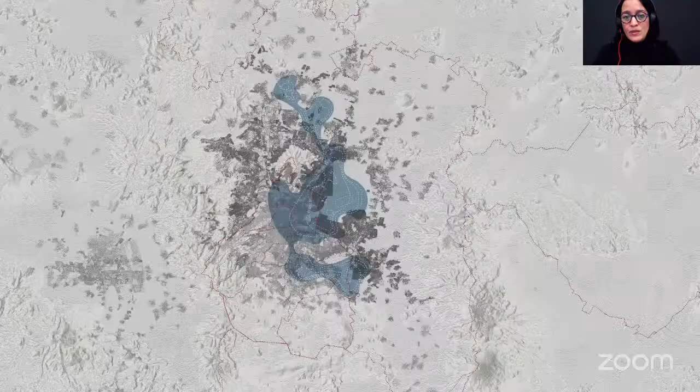These are the topics of some of the most known media about the water crisis in Mexico City. Mexico City is one of the most important cultural centers in the world, the most populous city in North America with 22 million people, of which 62% live in poverty.

Today, Mexico City faces one of the world's worst water crises. The two main sources of water supply are about to run out. If no action is taken, day zero may arrive.

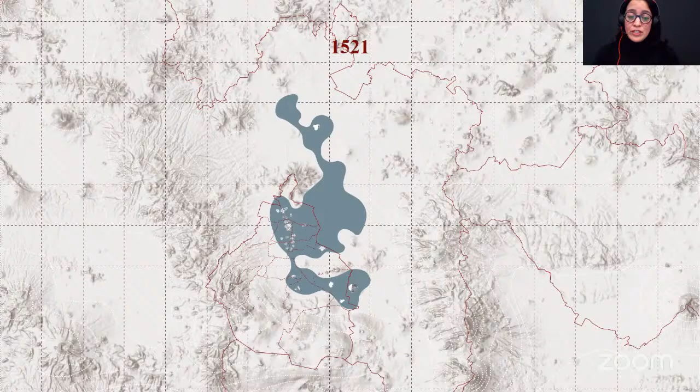What few people know is that 500 years ago, most of this territory was a lake. So how to erase a lake? In this year, the Spanish conquered Tenochtitlan, and from this moment, the drainage of the water begins.

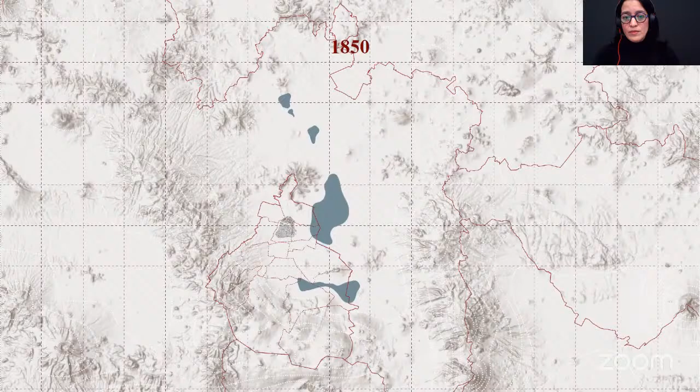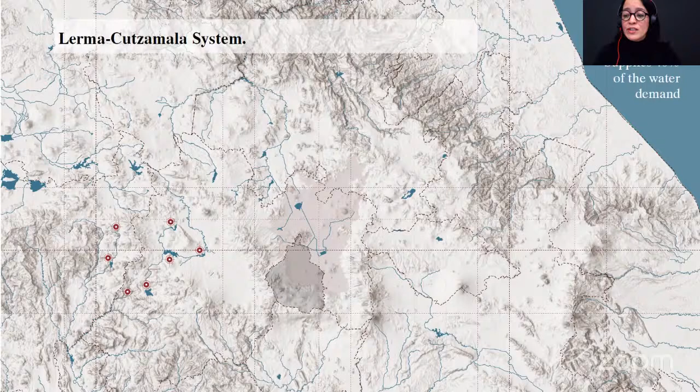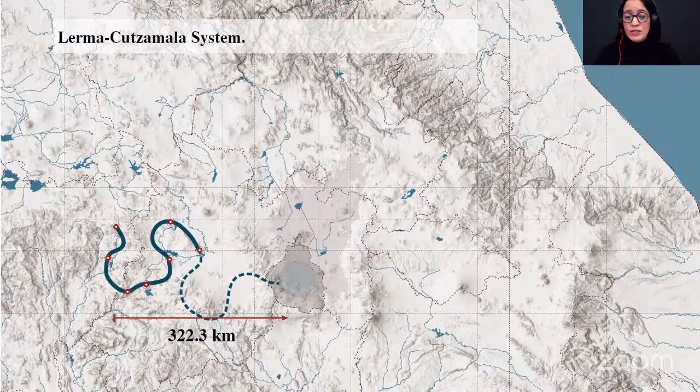So how to water a dry basin? How does it work today? First, Mexico City is located in an endorheic basin, defined as a region in which the river network is completely isolated from the world ocean. The water flowing in the rivers never reaches the sea. So the first water source is from outside the basin, called the Lerma-Cutzamala system, which supplies 40% of the water demand. The system consists of 7 dams outside the basin, where the water is pumped 322 kilometers. 40% of that water is lost due to leaking pipes. Today, these dams are only at 37% of their capacity.

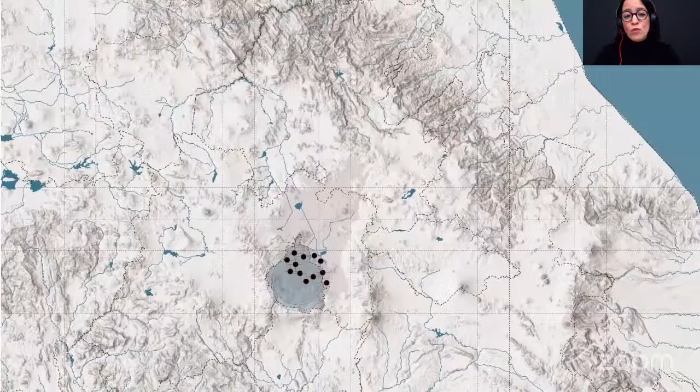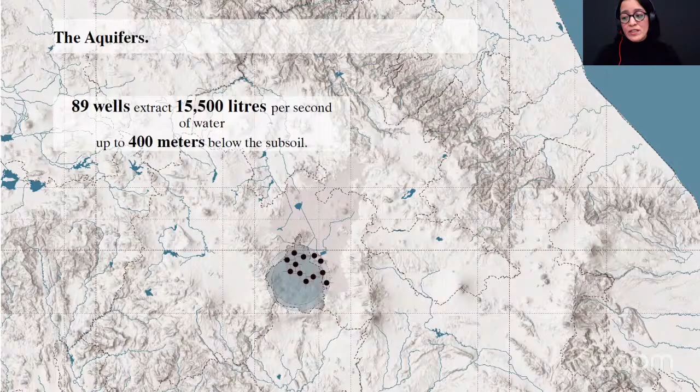The second water source is the aquifers, which supply 60% of our water demand. Located in the south, they occupy 17% of the surface of this endorheic basin. Today, these aquifers are overexploited by 215% without being recharged.

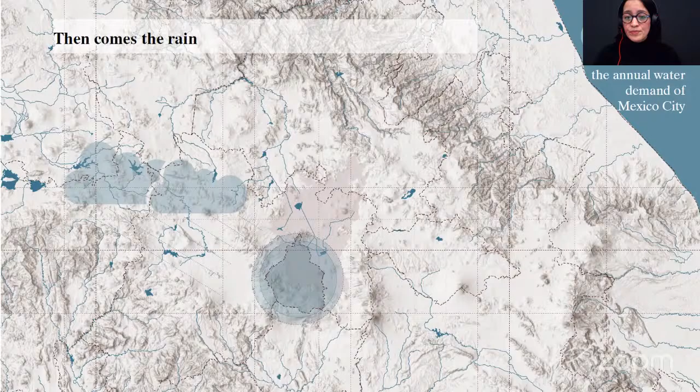And then comes the rain. It rains more than in London, and it rains 3 times our water demand in Mexico City. This is an image normal for us of a rainy day in summer in Mexico City, but if you live in another country, that's not normal. We are so fortunate — nature is giving us all the water.

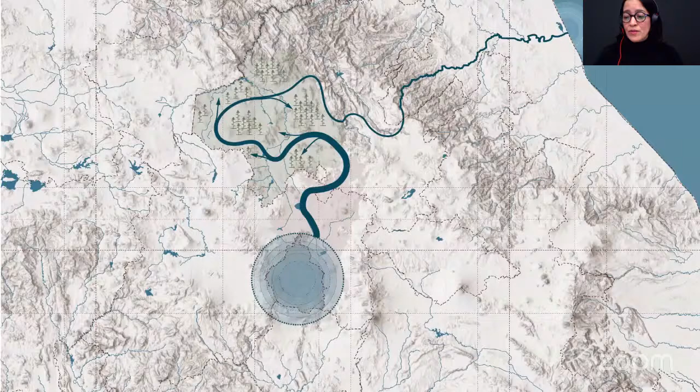But sadly, all this water is disposed, and after mixing with the raw sewage of the city, all the water goes outside the basin. When the water reaches the Mezquital Valley, part of the water is used for agriculture, and the rest goes to the Tula River, and in the end, it goes to the sea. That's how we get rid of all our water. Nothing stays inside the basin.

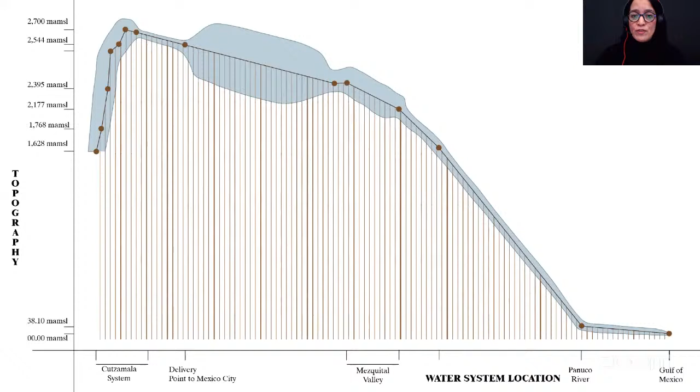This graphic shows the water journey in terms of amount and topography. We can look at the 7 dams at the beginning of this graphic, and the topography, how much energy we need to pump all this water to get it inside the basin. Then we lose 40% of it, and then we gain water again through rain and through the aquifers. Then we mix all this water and take it out.

And that's the problem. The aquifers are not being recharged. By removing all the water from the basin and having impervious pavement on the entire surface, they are being overexploited. All rainwater is contaminated with drainage, and the drainage system is at its total capacity and on the edge of collapsing. Water management in Mexico City, as you can see in this diagram graphic, is a linear and extractive system.

It should follow the natural cycle, the natural circle cycle. We should keep this water. We should reuse this water. So who has the power to make changes in the water management?

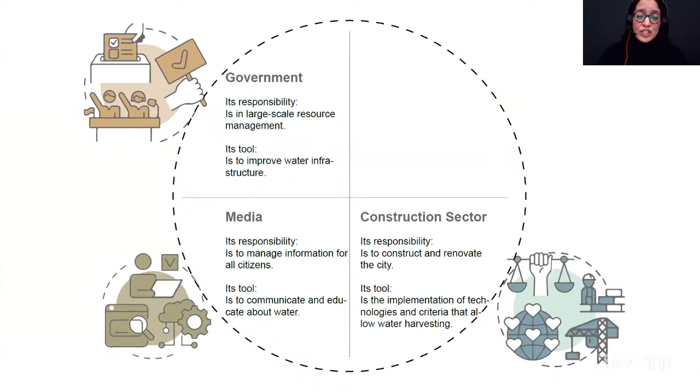First, the government. Its tool is to improve water infrastructure. Then the media as an educational tool to communicate about water. The construction sector with the implementation of technologies and criteria that allow water harvesting, and the citizens. It is a small scale, however, its impact is large scale.

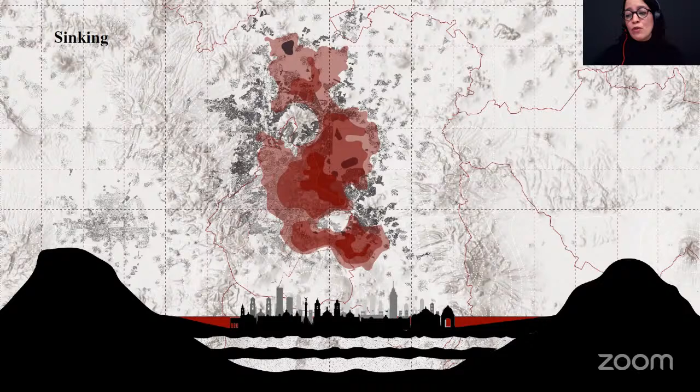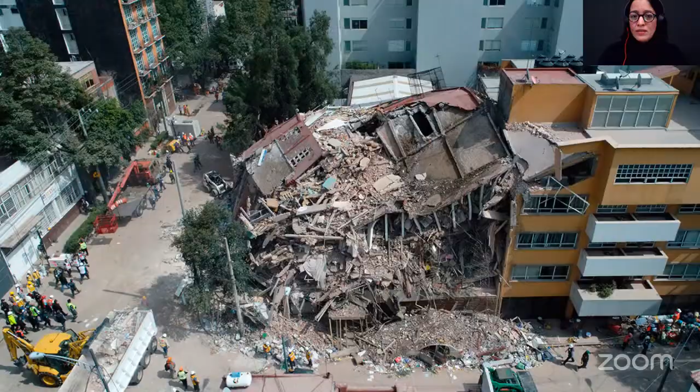But for us, our biggest fear is an earthquake, not a fire as here in Canada. There is an earthquake fear because we are living on mud. And not just that, because of the aquifers and all the extraction of them, there are new geological faults inside the city, which can generate earthquakes with an epicenter within the capital and worsen the earthquakes that come.

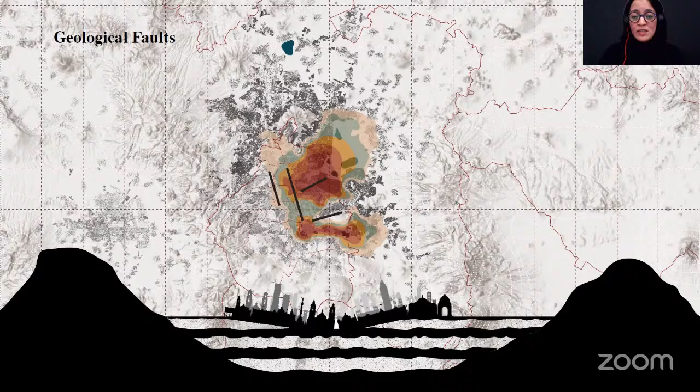And the worst, thirst. In a city where the percentage of population living in poverty is 62%, where 37% of households are victims of crime each year, is water going to be the new gold? Or are we going to care today?

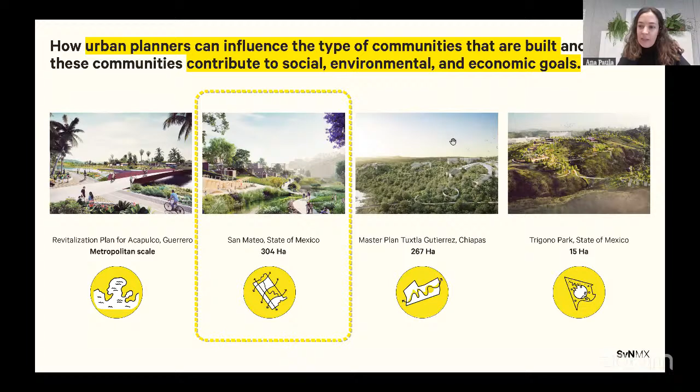So these are some of the projects that we've been working on in recent years. These have all been done with the private sector, and as we can see, there are large-scale portions of territory. So today I'm going to talk specifically about San Mateo in the state of Mexico, and the experience that we had with our client. The thing that we started to create here was four main strategies.

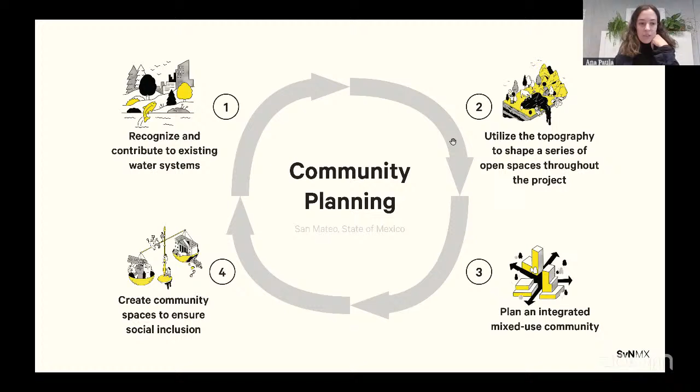So the first one was about recognizing and contributing to the existing water systems. As Ere was explaining before, we come from a history where the city used to sit on a lake, and today most of the water bodies have been gone. So what is the responsibility as us, as urban planners, to see how the city keeps growing?

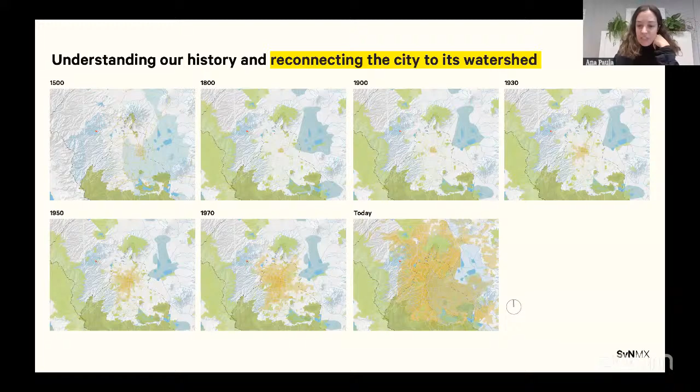So as you can see, this is what the ancient bed lake used to sit. This is the downtown area, and our site is located here in one of the ravines. These ravines located on the west side of the city are really important since they have their own ecological function. This area has been serving for infiltrating water into the aquifer, and it's really important for us to keep infiltrating this water since it avoids subsidence, and it's also 70% of the water that is consumed in the city.

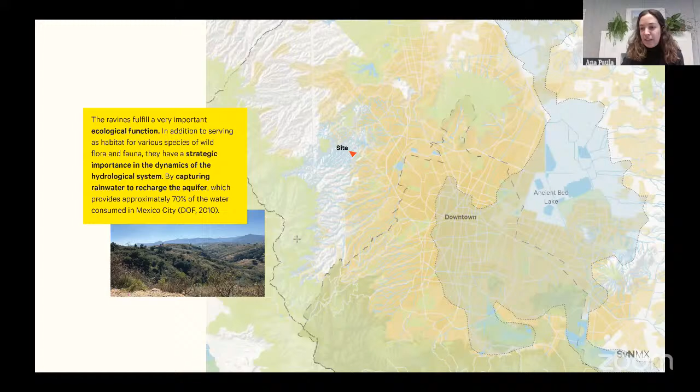So the first thing that we did for the project was analyzing the different landscapes of these ravines, and also recognizing the site's natural runoffs, understanding where the water is coming from, how it flows through these different ravines, and where it is going.

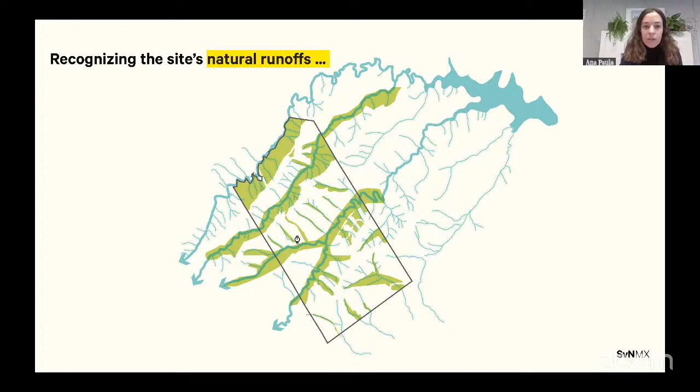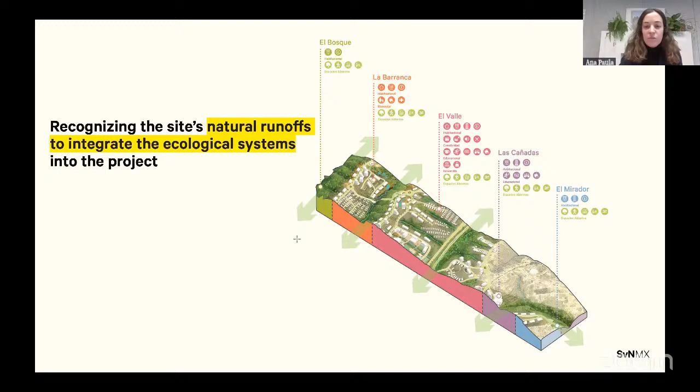So the challenge here was about how to merge the urban development with the ecological systems. For this, we applied different water strategies into the site, in which we decided how to add some floodable parks on the lower parts of the ravine to mitigate flooding. We also added the activities of reforestation along the runoffs.

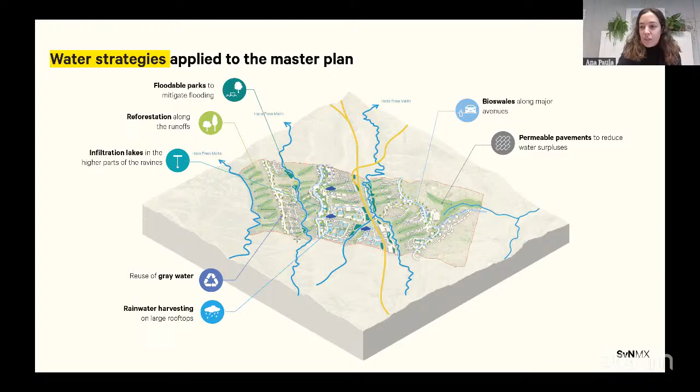Very important, having the infiltration lakes in the higher parts of the ravines as well as the bioswales, and also having rainwater harvesting on larger roofs. So these were some of the strategies that we started to apply to our project, intervening the different configurations of the master plan, on the roads, on the canals, on the roofs.

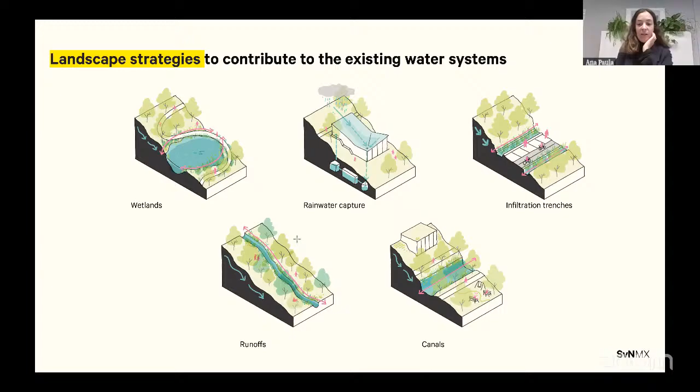The next one was utilizing the topography to shape a series of open spaces through the project. The first thing was analyzing how the ravines were configured. What we saw there was that we have these really big slopes, and there were some parts that were unbuilt areas and other ones that were built areas.

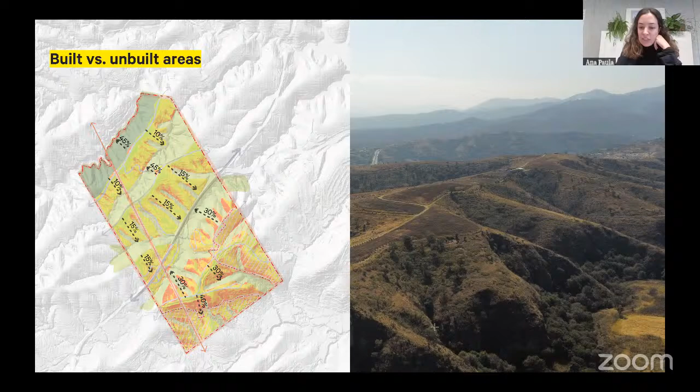We also realized that most of the vegetation was located on these unbuilt areas. So that helped us start working with the topography, creating vertical connections, outdoor stairs, having the topography allow us to have these green connections.

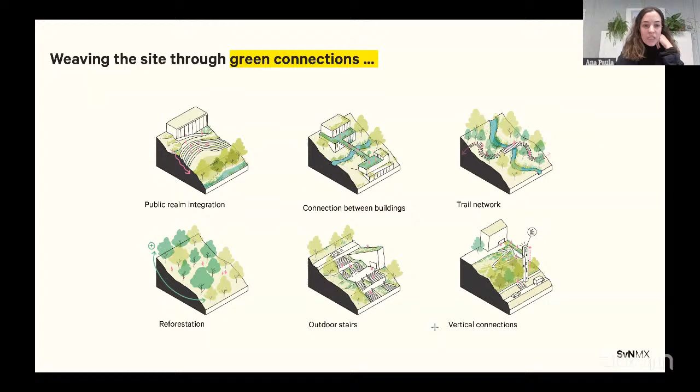And this was a great strategy because at the end, the ravines became the living green spaces. These would become the natural scenery for the development. These would be natural areas that would not need irrigation, systems that would live on their own.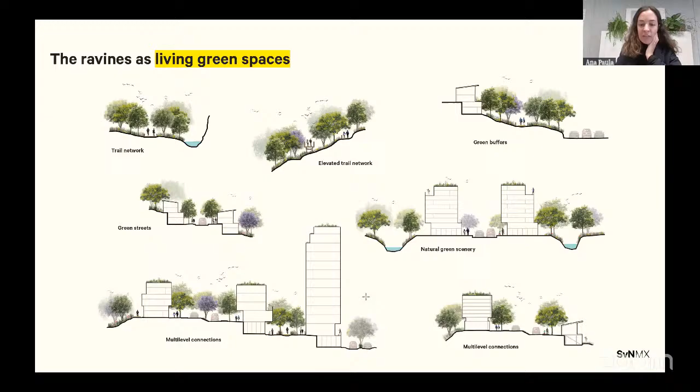And this is one of the renderings that you can see how the different buildings were set into the topography, how we had these floodable parks on the lower areas, and then activated through open space and public space.

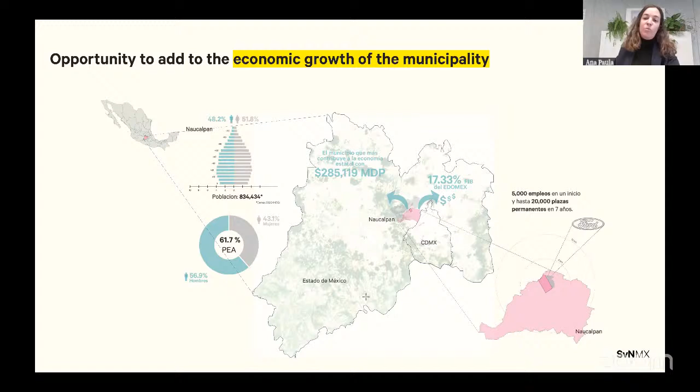Then our third strategy was how to plan an integrated mixed community. We know that this municipality has been having a lot of economic growth in recent years, and this is a lot inherited by the industrial sector located in the northern part of the city. We also have a lot of housing in the area, but we wanted to create a mixed-use community.

Here the client had different investors that were interested in the site. So one of the things that were part of the talk with our clients since the beginning was how to create a mix of hubs that could integrate in the same place. This is something very innovative for the area, since most new areas of the city become only housing areas, and people keep coming for work to the center of the city. So this was kind of an idea of trying to have a polycentric city, creating areas where people can live, work, and socialize.

So on one side, the client had a university that was interested in the site. They also had a film studio that wanted to invest in the area. They also knew about this new opportunity of creating a program of senior living, so that was like the health and wellness piece. And then we could also have innovation and technology adjacent to the industrial sector located on the site. So this became a really interesting exercise on how to create these possible program scenarios, and how the different uses would integrate and work together on the site.

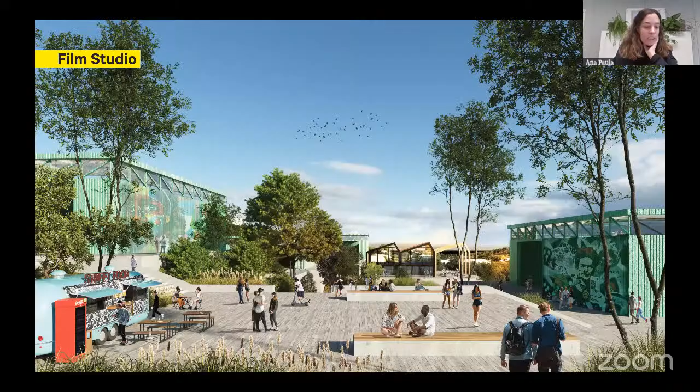As part of the last strategy, we looked at how to create community spaces to ensure social inclusion. We thought that was a really important topic since there's a big effort in tackling inequality here in the city, as Ere was mentioning as well. So what we did is propose 3 different community hubs along the project: one was the urban park at the north, the university hub at the center, and a community center on the south of the project.

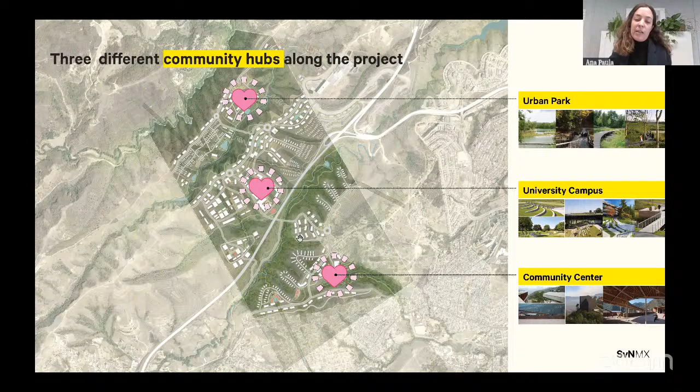I think this one was the most interesting, since we had some informal settlements next to our site. Talking with the client, we thought about having different programs in which we would give some social infrastructure to all these urban dwellers. So what we did is create a community center, a community library, and a park, so that way we could connect and give some services and social infrastructure to the rest of the city.

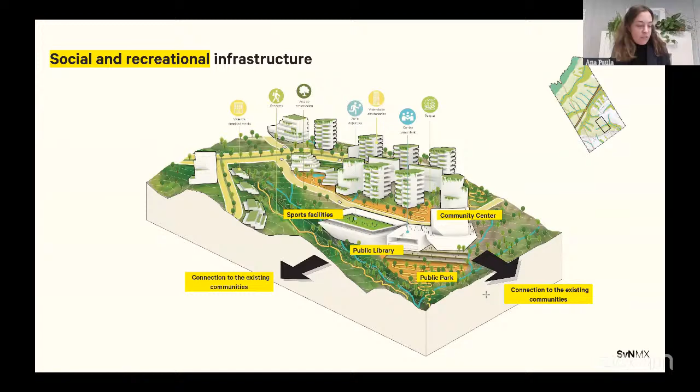And this would be all. I think it was a really interesting project that we did. This was a really concept design, but it was a nice exercise to work along with the private sector and see other ways to plan the city, because at the end we might think these are only enclosed developments, but at the end we're also creating the city. So I think it was a really successful exercise. Thank you, everyone, and I'll pass it to Monica now.

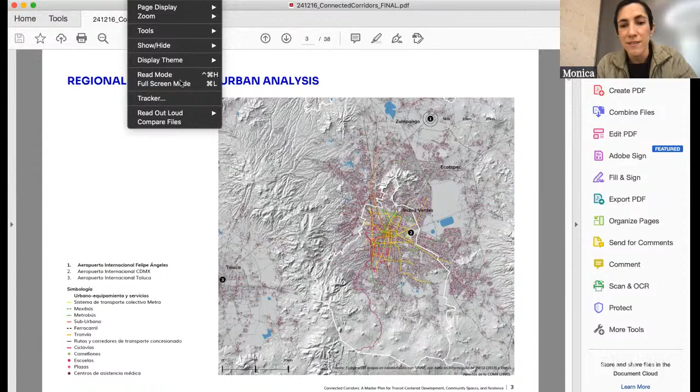Monica, we're not seeing your presentation. No, no, pero... there it is, no, pero. We're now at page 3. We can see page 3. Should I present it differently? Yeah, you can. Can you see it now? We can see your screen, the slide is number 3. Okay, is that okay?

Yes, sure it's okay. Yeah, okay, we did.

It was a challenge because we work with the public sector, actually the military. So we did a very deep analysis so we could fundament our theories and what we were going to prove.

So this is a regional analysis about the urban area, and how the city and the public transport in the city has expanded. All the water systems in Mexico and the environmental analysis.

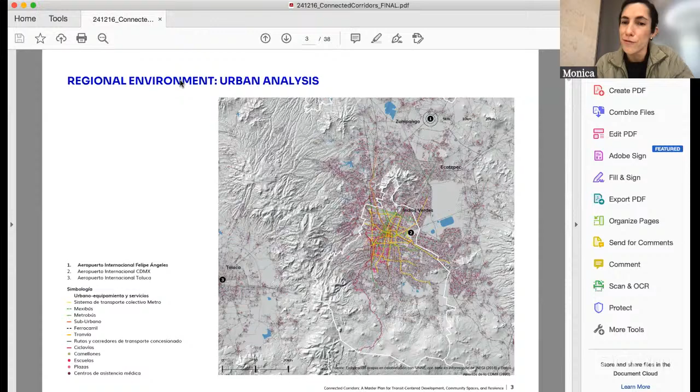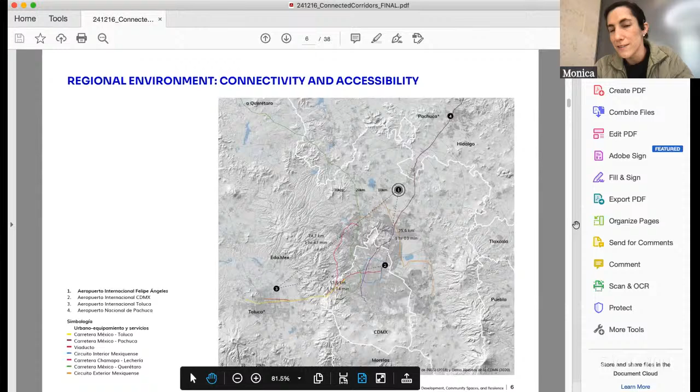I'm going to go through this very fast. This is really interesting, we're just seeing page 3 still. So I'm going to do it here. Yeah, better, there we can see it. I don't like it, but it doesn't matter.

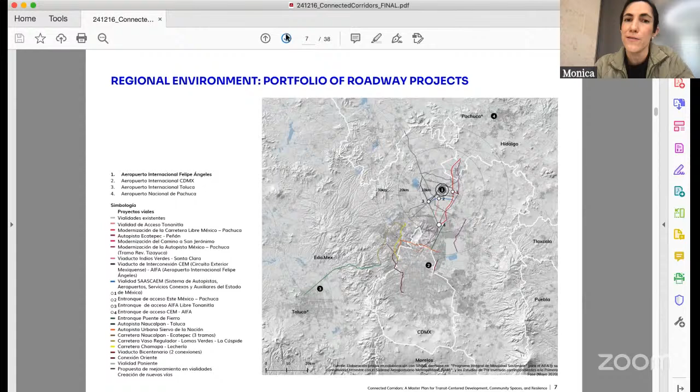So this is a map showing all the future projects that the military, the public sector, and the private sector were going to implement in the following years.

And this is the site. So you can see it's a very small site right next to the highway, where we analyzed the flood risk and the mobility system that we're going to go through.

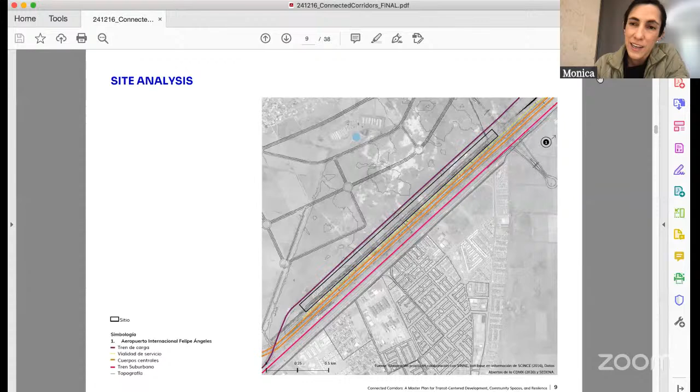Actually it was the suburban train, the industrial train, a mobility tram that was going to be located right here, and the airport that was going to be located in the north. It's actually already built.

So our opportunities were to implement strategies that actually detonate the economic activity of the area, because it's surrounded by very low income housing.

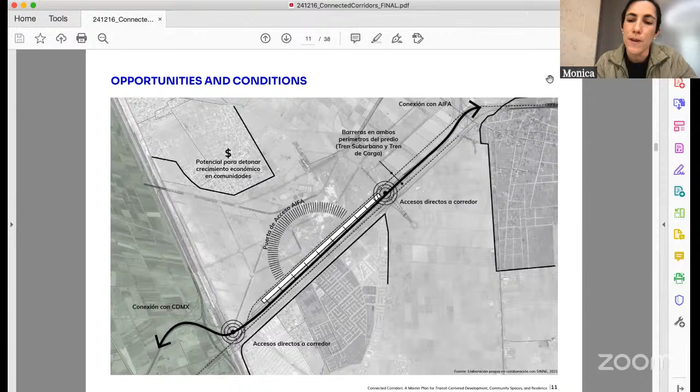But also give a space within the huge mega scale site, give a human scale so the adjacent communities could have community and public spaces. So although the project is small, it is significant for its comprehensive approach, combining hydrological, social, economic, and transportation-oriented development solutions.

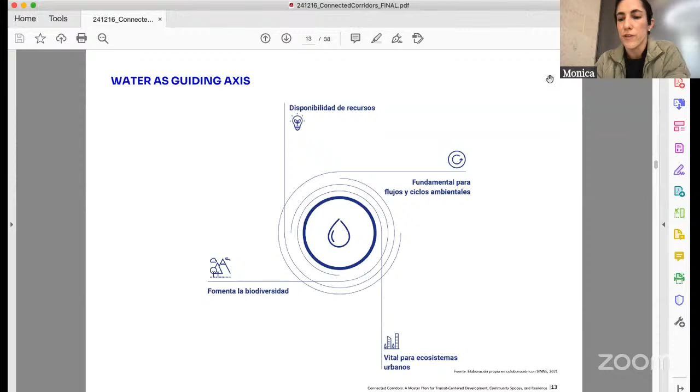So what we wanted to implement in terms of water as a guiding axis, we used all the residual spaces within the master plan to implement water strategies in terms of capturing.

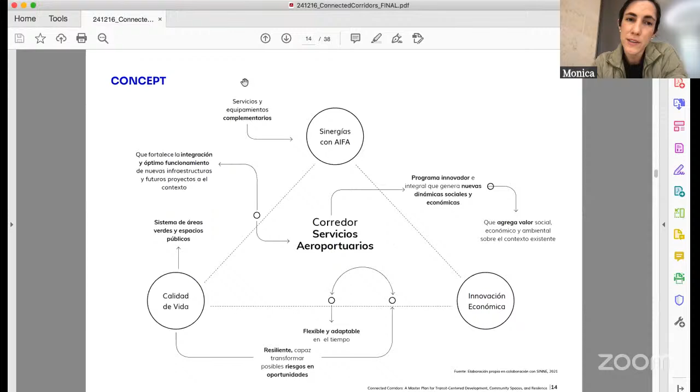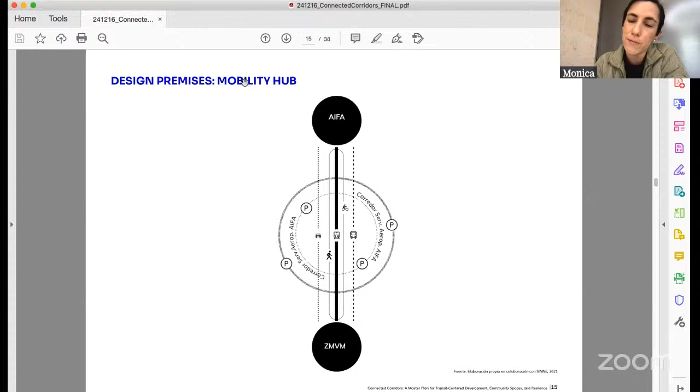So what we want to show here, the diagram shows that the corridor and the master plan we are planning actually represents a huge opportunity to connect in a local, regional, national, and even global site.

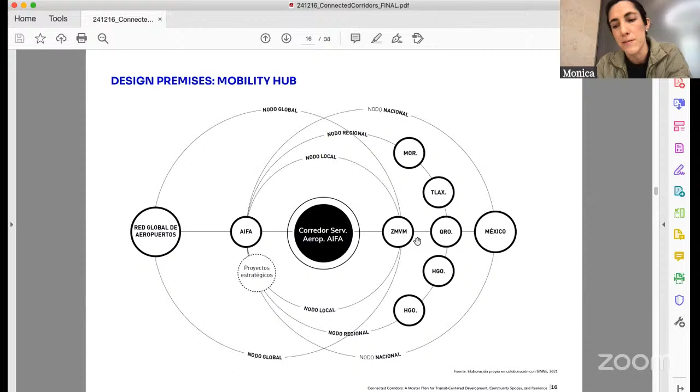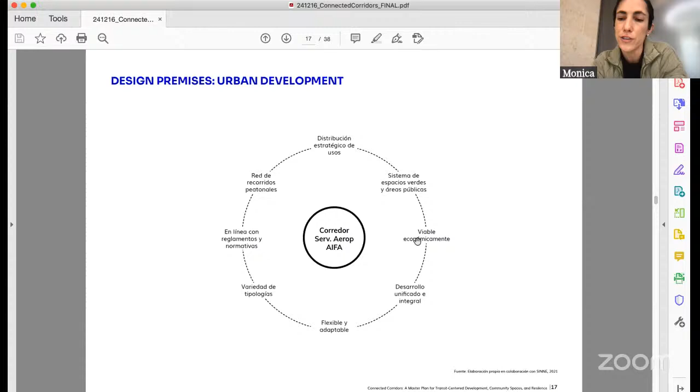So we wanted to give the airport extra facilities for people, because the airport city was viable economically, and we wanted to present the population living nearby and the future employees of the airport with opportunities and places to be. So our main strategic axis was a space that is flexible and adaptable through time.

It is the access for the new airport, actually. It proposes a permeable system, not only for pedestrians, but also connects both sides of the highway, and creates a system of open spaces and commercial spaces.

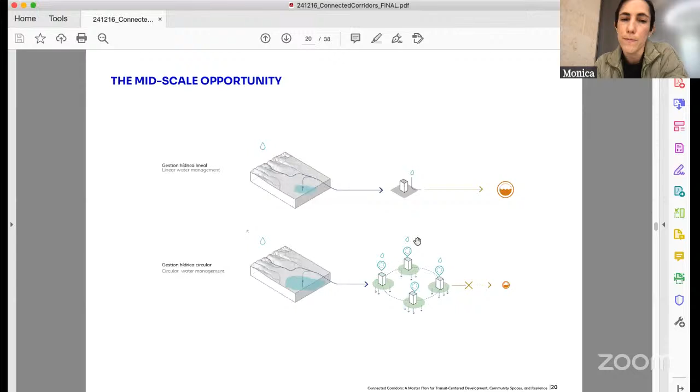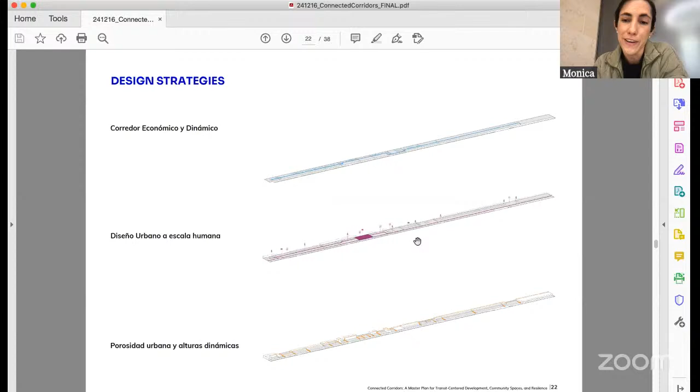So here you can see the complex form of the master plan and some of the design strategies we actually used in terms of water.

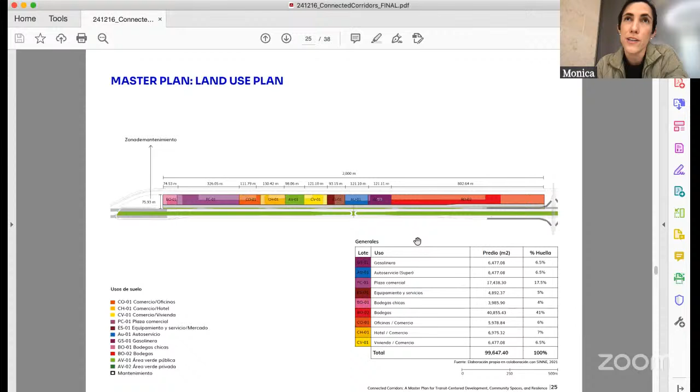The master plan included, after a market analysis, several programs like hotel, housing, and also programs that are going to be servicing the future airport.

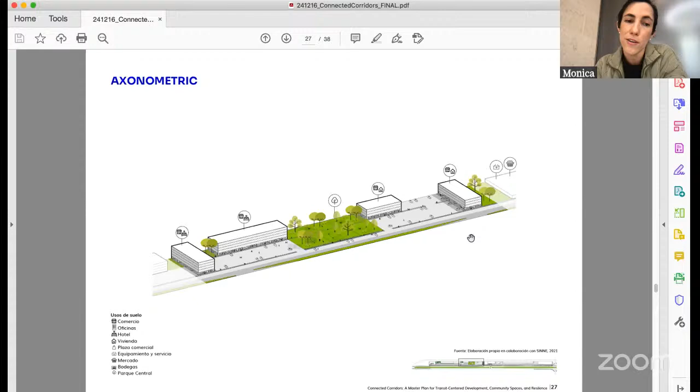But we wanted to give the communities alongside the highway public spaces that actually become a sponge in terms of water, that capture and infiltrate the water and treat it, so the communities alongside get benefits and also the master plan.

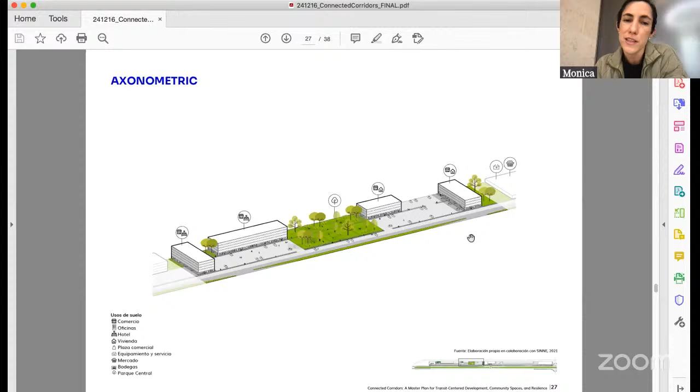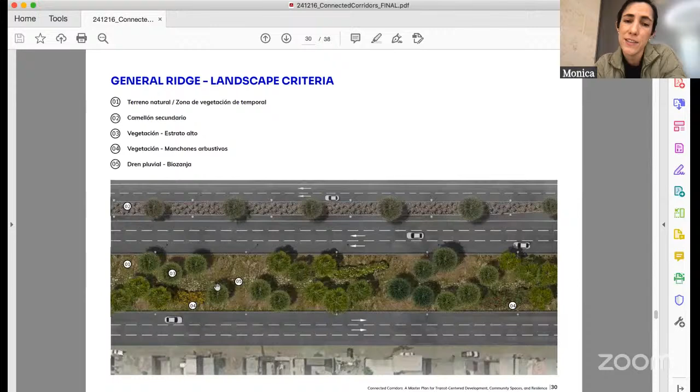So we used the landscape and the small lots to implement different strategies in terms of landscape, to change the scale of the city and implement water strategies.

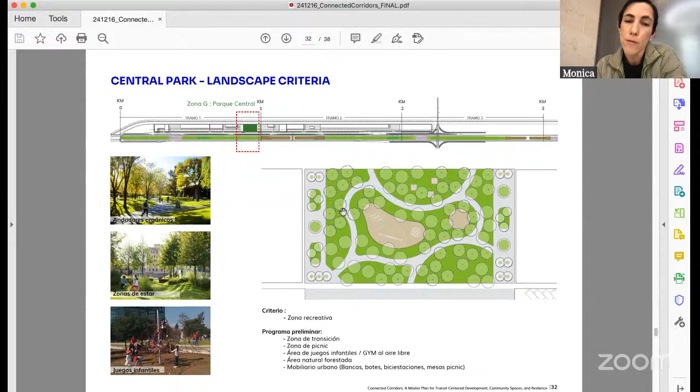So here you can see the park within both sides of the highway where we implement strategies of water resilience, but also use nature from the area, so it is actually resilient. We also propose a buffer between the commercial area, the housing, the urban equipment, and the highway.

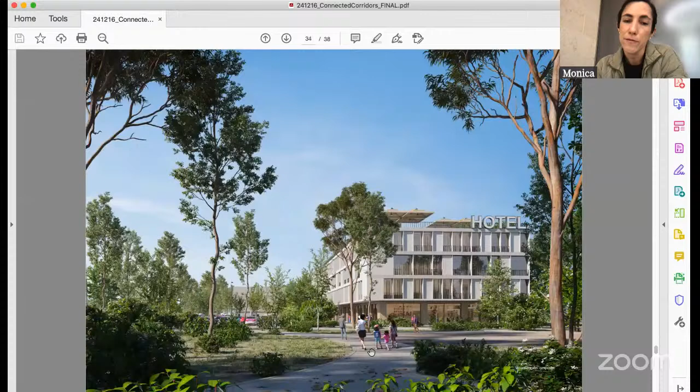These are some of the renderings from the parks, showing how we imagine the place and how it's going to be. I know it looks kind of car driven, but it's actually what they required us to do.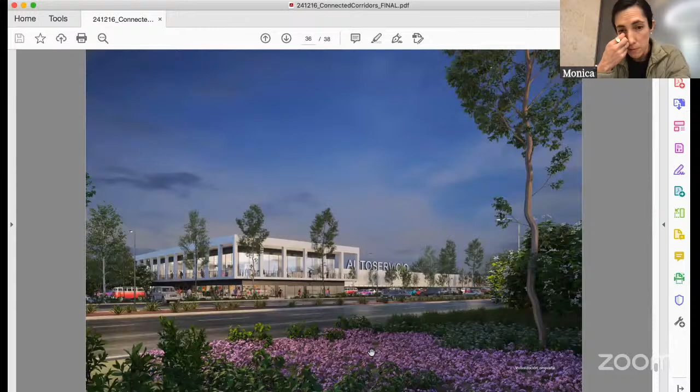And I think that's it. Thank you.

And I am back. Wow, that was, I really enjoyed the presentations. Thank you so much. We have some questions. I also have some questions, but let's start with the audience question, just out of respect to the audience.

Okay, how does creating these community hubs, oh, that's probably for you, Ana Paula, and new social infrastructure help a city where 60% of the population is living in poverty?

I had a version of this question, so I'll add mine. When you talk about inclusive communities, at least here in Toronto, a city growing through massive immigration, it's basically about representation of diversity, social background and wealth. That's part of it, but definitely not the extreme of what Erin covered. Can you speak to the creation of these social hubs, and what does inclusive communities mean in your context?

Yeah, sure. So there's been a lot of effort, for example in the case of Medellin, of how through social infrastructure you can tackle inequality and poverty in Latin American cities.